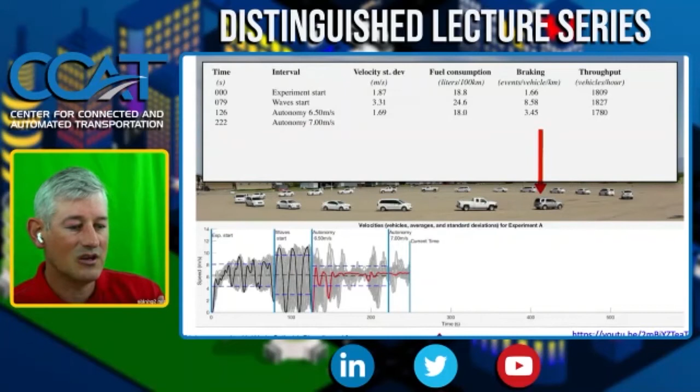At this time, we've transitioned from human control of the velocity to automated control of the velocity with our controller. And as you watch over time, these traffic waves that used to be so prevalent are now starting to dissipate. And there's a lot more information that's flowing along here than just how the traffic itself is starting to dissipate. We're able to measure the standard deviation of the velocity.

We're able to measure the fuel consumption of the individual vehicles, how often they're braking, as well as how many vehicles are moving through a certain spot on the ring at any given time. And what's really neat about this is that we can continue to adjust what are the expectations for how fast this traffic can go. And we can see that there's a threshold past which it can't go, that even our automated controller can't stabilize the traffic. And so then we have to keep adjusting our expectations there.

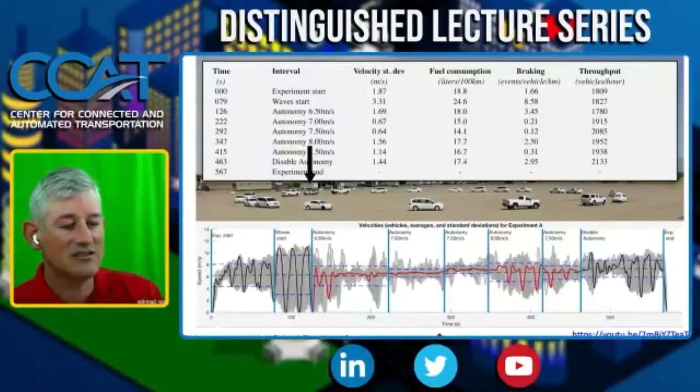And finally, when we turn our controller off, and you can see the arrow is switched back to black here, those traffic waves come back and we start to see the same kinds of high and low braking and velocity that we saw before. So again, there could be a lot of exploration of what's kind of going on here.

I want to skip to talking about what are the data pieces that we got out of this experiment, because you can begin to see when you start to look at these data that there's pretty clearly at the beginning some times when we have traffic waves happening. When we turn on the autonomy, we see those traffic waves begin to attenuate and be dampened. And then over time, the traffic waves themselves really kind of go away until we try to go too fast again.

So part of the overall control expertise that we're trying to do here is to figure out what's the best that we can expect from this particular traffic stream so that we can keep traffic moving and keep people safe. One of the nice outcomes, by the way, was that we discovered that there was something like a 40% decrease in fuel used between when the waves were happening and when we were in autonomous mode at about 7 to 7.5 meters per second. And that led to some follow-on work sponsored by the Department of Energy that I'll talk about just a little bit later.

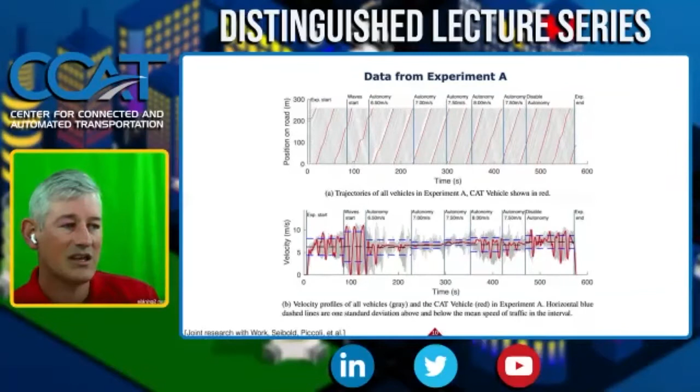So the controller that we were using for this, again, came from exploration of how we could do this in a way that the cars would be driving as much like a human as possible. So I want to talk just briefly about what that controller was. It was a controller called the follower stopper, which was named because there was another controller called the obstacle stopper. This one is the follower stopper because it follows a car instead of just trying to avoid an obstacle.

So with that little bit of an introduction, I want to skip a lot of things that went into this test that are really interesting, but take away from the overall time that we have with each other, and just skip to the results, which any moment now should be coming.

One more time with feeling. Yes, here we go.

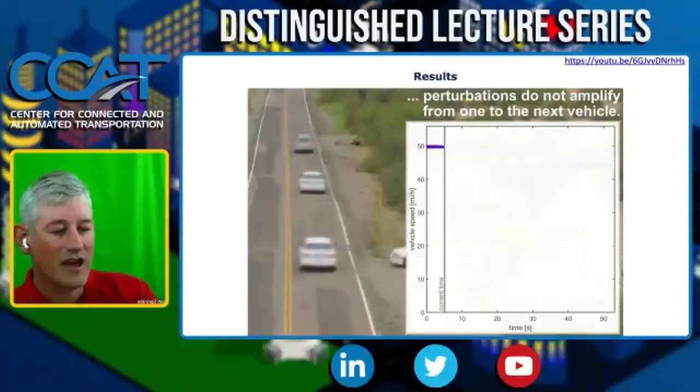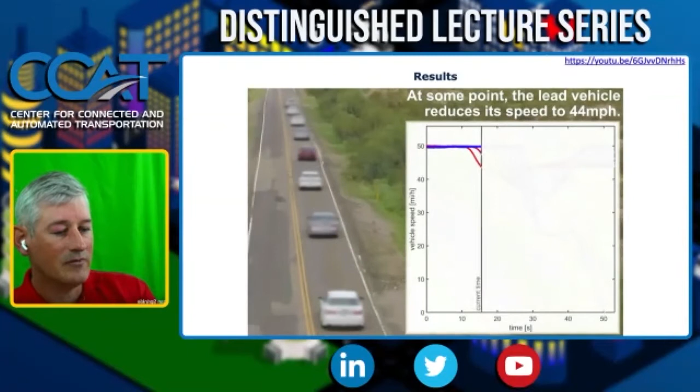Again, this is a great example of some of these superb Arizona roads that have nobody on them. This is actually not a police car over to the right. It's just somebody's car that's parked there. So there goes the CAT vehicle in the front, and then we have several other vehicles behind that are just using their existing ACC controller to follow the car in front. So the CAT vehicle decreases its velocity by about 6 miles per hour total, just enough to turn the brake lights on, actually, which is why we chose that amount.

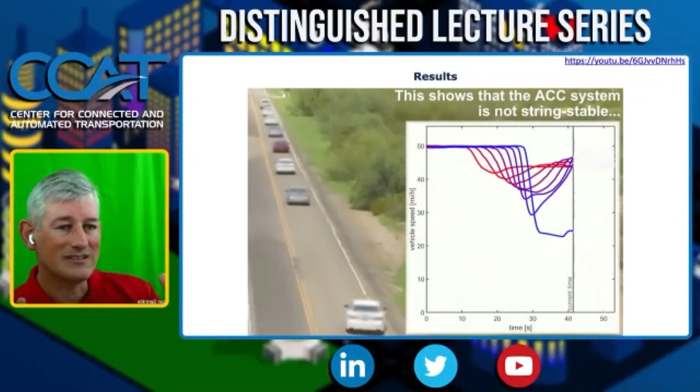The next vehicle brakes, it gets down to about 10 miles an hour slowing down, then 12, then 15, then 18, then 20, until the last car, which was driven, by the way, by a qualified stunt driver, falls off so low that the cruise control in his vehicle actually switches off. And beeping sounds happen to tell you that a collision is imminent if you don't brake, et cetera. So it's really kind of a frightening thing. And what we saw was that if we put a bunch of cars that have existing cruise controllers on the road with each other right now, it does not make traffic better.

It actually makes it worse. And that leads now to us thinking about, again, how do we navigate this time? But what I want to highlight for a few minutes is the test bed that we were using and how that test bed allowed us to come to some of these kinds of conclusions.

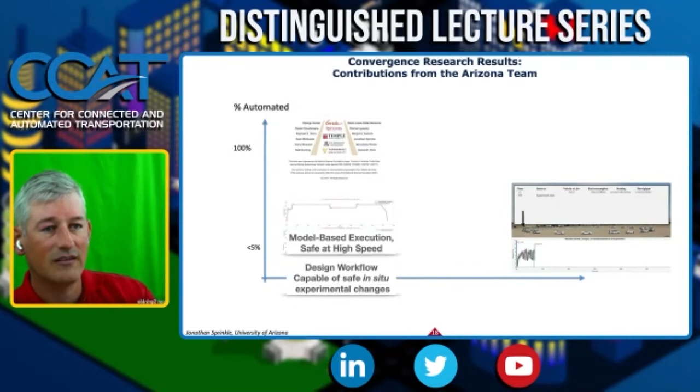On the one hand, we had this almost everybody automated kind of experiment that we did, where a lot of the things that we needed to have was model-based execution that could be safe at high speed, that we could verify the kinds of control inputs we were going to provide, and that allowed us to have really rapid in situ experimental changes. As an example of that, we would do an experiment, we'd come back and look at the data, and then in 20 minutes, we would decide how many cars we can put in the next string so we can run it again, and will that result in the potential for a collision, or will we still be safe?

Certainly, it also involved us figuring out in the experiment what our intermediate velocity set points should be so that we can trigger the ACC response. And so if we needed to do those kinds of things on a long time scale, it could have taken months to figure this out if we needed to go through code reviews, et cetera. What we were able to take advantage of was the code generation that's possible in model-based design so that we can make those decisions rapidly.

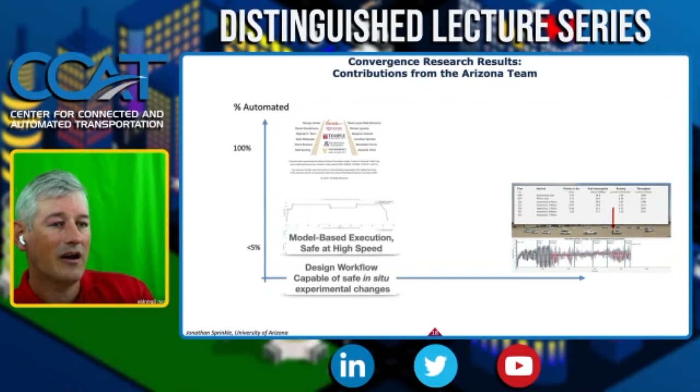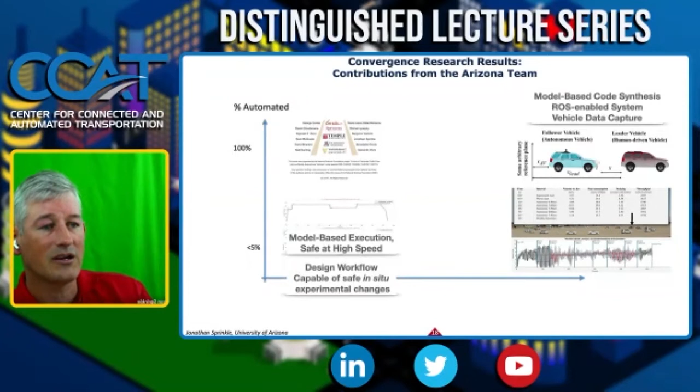In the experiment with the stop and go traffic dissipation, we really needed to have, again, that model-based code synthesis, the ability to look at system data in real time with the robot operating system, and to capture vehicle data for reasons that I'll explain later. And this all came through because of the CAT vehicle testbed, which is something that we've been building now for right around 8 years at the University of Arizona.

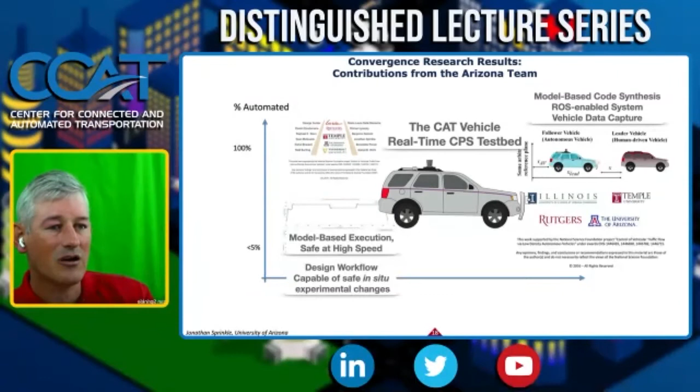And as we've moved through different phases of the testbed, I'm going to show you some of the cool things we've been able to do and why this testbed is so critical to doing this kind of research, where it's not just building an autonomous car, but it's exploring the new theory and applications that we need to have for tomorrow's vehicles.

And if you want to find out more about the testbed or want to see the kind of things that are happening with it, look us up on the CPS virtual organization, where you can find the most recent release and example tutorials to go through in order to see what's going on.

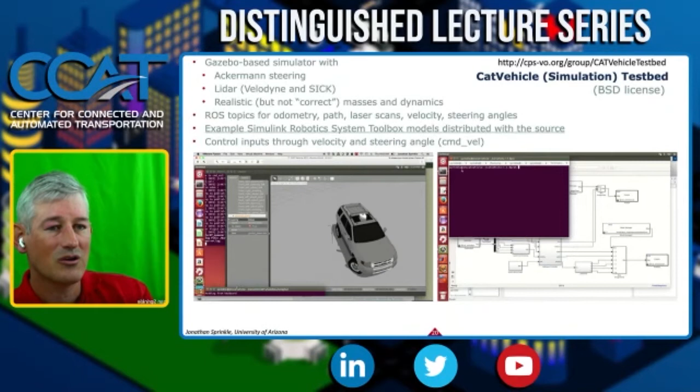The testbed has two pieces. One of them is the simulation piece that allows you to do software in the loop testing. This gives you a full-size looking Ford Escape, which is the kind of vehicle that it is. And that full-size vehicle, we can drive around. We get realistic information from the sensors on board the vehicle, and we get realistic masses and dynamics for how the vehicle itself behaves. Importantly, we are consuming data that comes off of the car in the same structure and at the same rate that we get those data when we're using the car physically as a test bed.

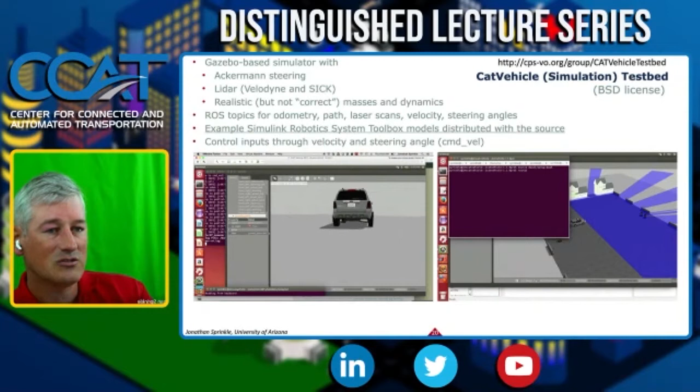So for example, we were able to use some of those features of the software in the loop test bed to validate that we weren't going to crash into stationary objects by creating an environment filled with stationary objects that we tried to drive through. So what you're seeing in the bottom right-hand corner is me trying to drive through a house. I put a house in the path of the trajectory that I was trying to follow.

And I'm not trying to navigate around the house in this case. I'm trying to actually drive over it. And so I've got a component that's inserted in between my desires, which is my desired trajectory, and the vehicle's desire to not crash into houses or anything else that it can see with its sensor.

And so one of the cool things you can do in simulation is that you can just pick up stuff and move it. So I can keep picking up the car. It keeps trying to drive through the same area. So that gives us some ideas that it's robust to position, that it's not just something that we're lucky.

And something that you can't do in the real world, you can't just move the obstacles out of your way like you would move a house. But in simulation, you can. And then we can see that the vehicle is able to take off and drive around.

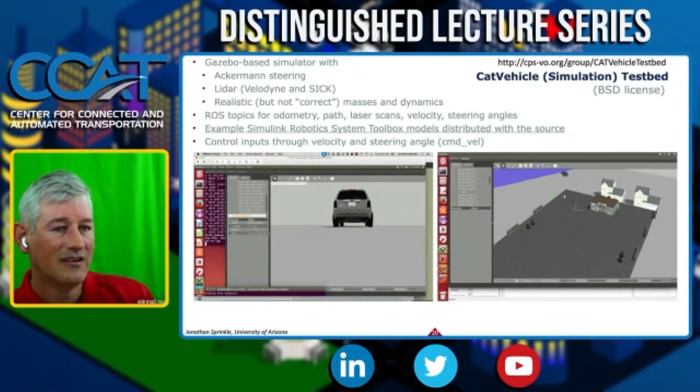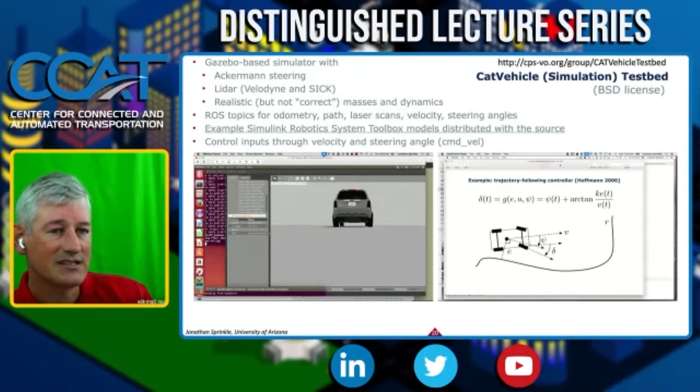So by building up these sort of good feelings about how your vehicle is doing in software in the loop, you can get rid of a lot of the logical errors that you might have introduced in handwritten software by checking to see how things are going with software that you're generating from Simulink-based controllers, because you can test them in Simulink and then move them to the software in the loop test bed. Once things are working in the software test bed, we can move them to the physical test bed.

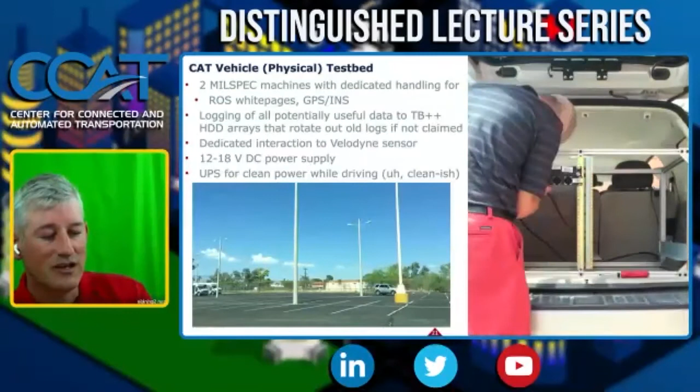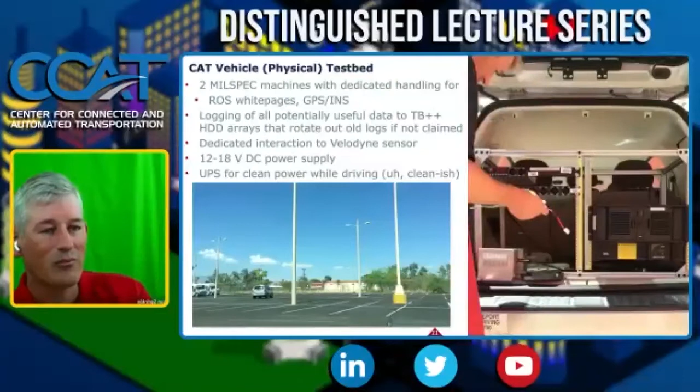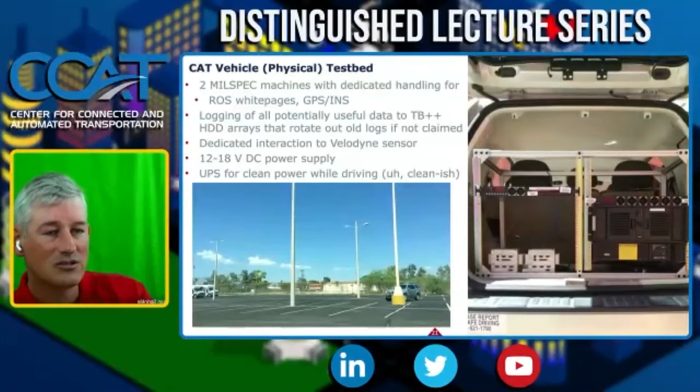In the bottom left-hand corner here, you can see results of an experiment from some of our summer students who were testing that controller that's designed to not drive over physical obstacles out in the middle of this parking lot that's filled with light poles. So if you want to make the dean of your college really nervous, you can say, hey, can you give us a parking lot with a bunch of obstacles in it that if we run into them will cause a lot of damage to university property, because we would like to test our controllers.

The dean gets really nervous in the beginning until you can show them that it's working in software to give them the confidence that they're willing to let you go out there. And of course, it's on me if we actually hit one of them, it has to come out of my paycheck. But that's part of the overall approach that we're using here to build up that kind of confidence and use the tools that are available in the state of the art in order to validate that the work seems to be working.

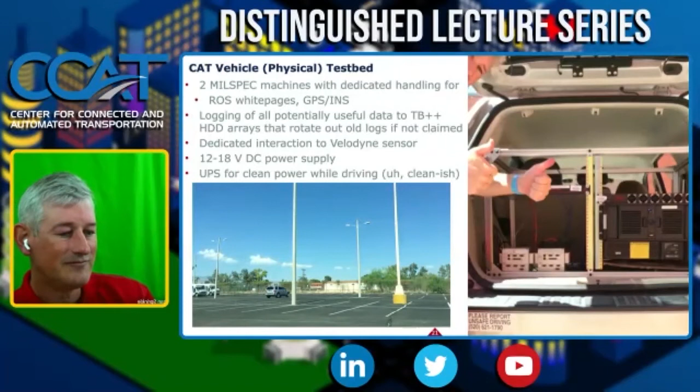The way that we're able to do this is that we're able to depend on a lot of software at different layers of the interfaces so that we can get the kinds of performance that we need in order to do real cyber-physical systems research that we can scale to a societal level. And we're able to do that because we have access to the low-level actuators and sensors of the car.

We have access through ROS to be able to send essentially computer commands to the OpenJAUS framework that runs on the car. And then ROS itself allows us to consume data from sensors. Somebody else is writing all of that code and we're able to just leverage it to produce these topics that allow us to get state information as well as control level information about what's going on.

What we see as we develop and build this as a tool that we want other people to use instead of just the people in our lab is that we'd like to have an engineering or scientific workflow that takes you from your idea to the implementation and allows me as the overall gatekeeper to how people should be using the test bed to ensure that we're doing it in a way that I know to be safe by the evidence produced by the students or the other faculty who are using the test bed.

So we begin by having some traditional kinds of simulation like you do in MATLAB and Simulink. We replace the synthetic data sources that might come from the sources blocks within Simulink with data that are coming directly from something that's recorded on the car or something that's recorded from the simulation environment. We validate those kinds of behaviors within Simulink.

We generate code using MATLAB Simulink's code generation tools to generate ROS level software that we can then run in our software in the loop simulation and then directly deploy in the hardware in the loop to either simulate with, again, canned data or to use the physical platform and then do work there.

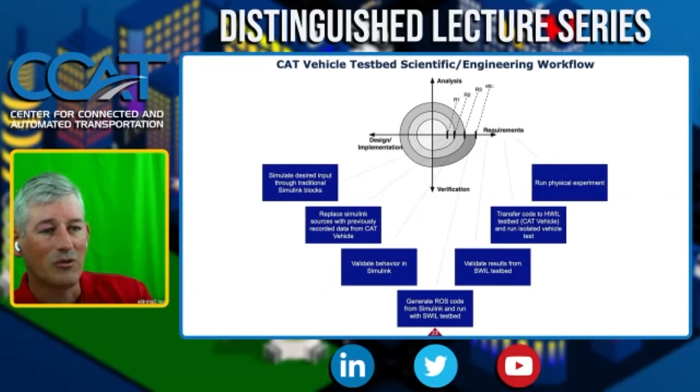So by taking advantage of this kind of work, we can stage different requirements of the process and take a more agile approach where every stage in the process has a different requirements level that you're meeting. And then over time, you build confidence in how your system is behaving. And it stages actually really well, so that over a 10-week period, for example, in the summer, our undergraduate students can go from knowing almost nothing about autonomous vehicles to being able to show a final demo with a car moving around in a parking lot with nobody inside, which is really nice.

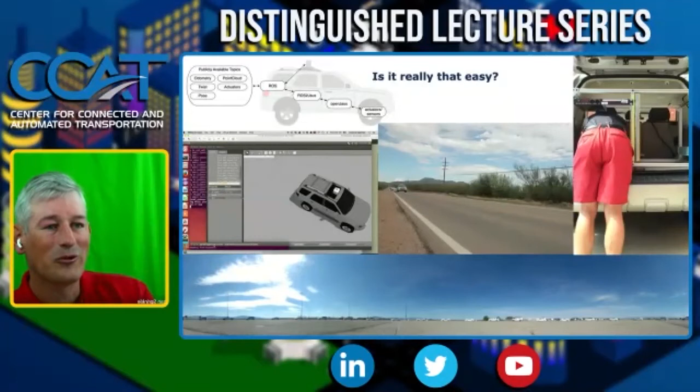So I'd love to say that it's really that easy, that that's all you really need to do in order to have a test bed like this that can do really crazy research on short time scales, that all you need are those software layers, and you can use those software layers at different phases. But unfortunately, it's not actually that easy.

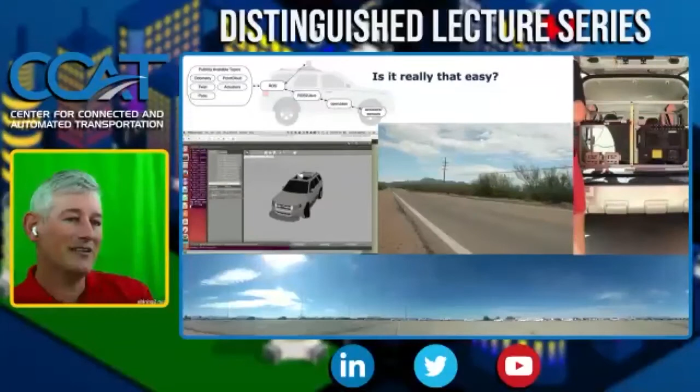If you want to be able to do some of this kind of societal scale research with cyber-physical systems, you need to get an idea of what kinds of challenges you might run into when you make those deployments. So for example, two things that I want to talk about fairly briefly are the kinds of delays that you see in sensing and filtering when you want to deploy a system like this, as well as delays in the actuation and dynamics that you have to take into account if you actually want to do time varying kinds of control with a system like this.

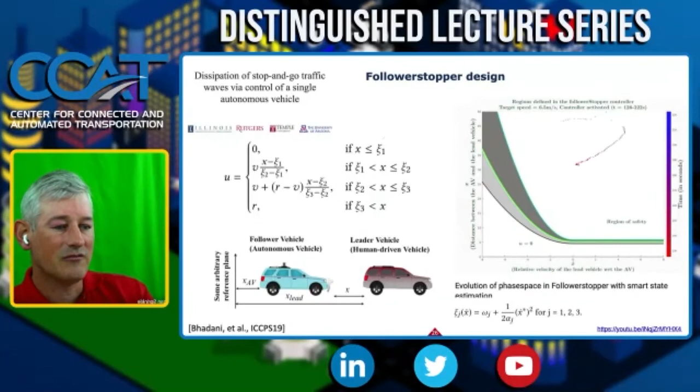I'll talk about it first in terms of the follower stopper that you saw earlier. I think you probably remember this slide where what I'm showing over on the right is the distance between you and the car in front of you, which seems like something that, yep, if I had that distance information, I could design a controller like this and we could make it happen. And many of you in the control area might actually have looked at this controller and thought, that's a really easy controller. There's kind of not much to that. I'm not really sure what the threshold had to be to have a more sophisticated controller that might be able to do more sophisticated things.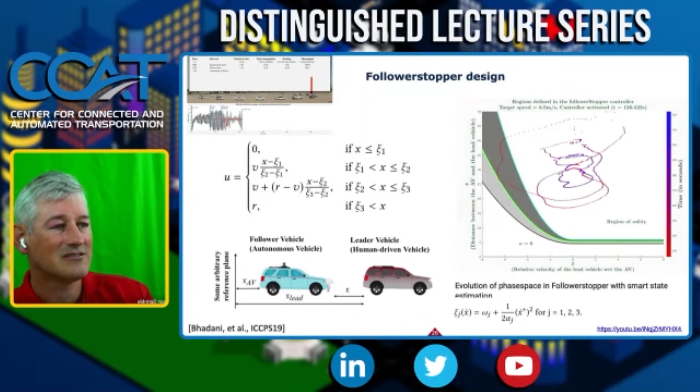And one of the reasons we ended up using the controller that we did was trying to mitigate the challenges that we had in using real-time sensing so that we can make real-time decisions based on the data that we had. So for example, if we just sat behind a car in the parking lot and both we and the car ahead of us moved at the same speed, we would sometimes end up with these vastly different estimates of what's happening.

And so actually the top two charts show you what happens if we just sit in front of a wall and run the laser sensor and estimate the distance to the target. Sometimes we get these really large distance estimates that if we interpolate them and divide by delta t, we end up with an estimate of say 4 meters per second, when in fact the obstacle is not moving at all. And so we have to be able to overcome these kinds of things by adding filtering to the system. But when you add filtering to the system, what you end up with is delay.

So in this example, I'm actually playing the same data set that gave us the estimate of the phase space of relative distance and relative velocity of the car ahead. But on the right-hand side, you're getting the raw data from the laser sensor. And so you have to make this trade-off between how many steps do you want to sample so that you can get an understanding for how far away you actually were and what your relative velocity actually is, versus on the right-hand side, if you want to act on the most recent data, you're going to be stopping a lot more than you should be because you're going to be getting these outliers that make it look like you really need to stop when you actually don't.

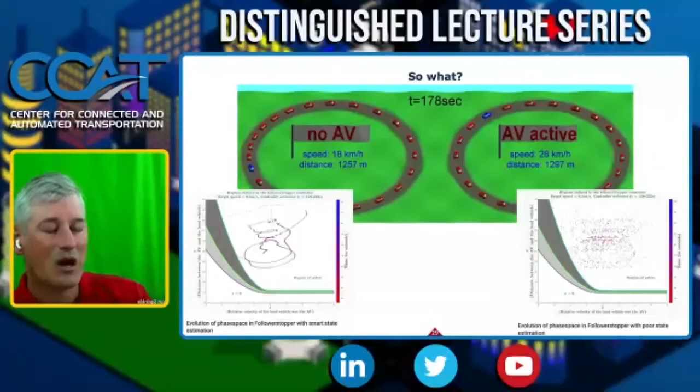And where this really matters is if you wanted to use some of the more sophisticated control algorithms. What I'm showing in the simulation at the top here is an original controller that we designed that seemed to show a lot of promise, because when the AV was active, we were able to see a tremendous impact in the positive behavior of the overall stream. But when we tried to execute the controller outputs that we got from that controller, we found that we weren't able to execute them, both because of problems in the sensing delay, as well as problems in actuation, which I'm going to show you in a few minutes. So that's the other half. These delays in actuation and dynamics limit what it is that we're able to do, and we need to overcome that also through software interventions.

And it's kind of a worst case scenario when you're trying to keep traffic from stopping, and the controller that you're using to keep traffic from stopping is actually making your car stop. And so if we tried to execute this controller, without a doubt, we would have made things worse and not better.

So we took advantage of some of these software interface layers and were able to build some new low-level controllers that were executing at this ROS2Jaus and openJaus layer instead of just the ROS layer, so that we could inject new controllers that had a faster response time in accordance with the dynamics that we had, so that we could follow time varying trajectories a little better.

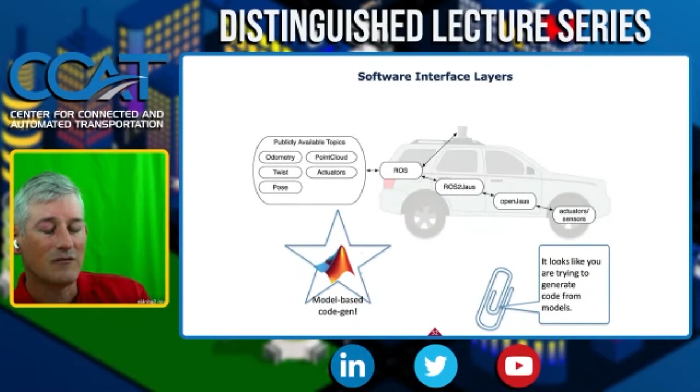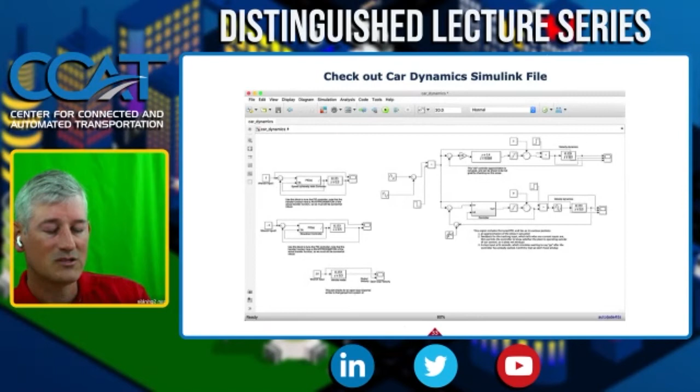And again, I think actually Ram Vasudevan, who might be on the call, he and I had a tutorial session at CDC last year, so you can find a lot of the code on this based on that CDC tutorial session that takes you through this. Essentially, we built some car-like dynamics based on system ID. Once we had the dynamics from there, we designed and prototyped some PID controllers based on some off-the-shelf techniques.

The simulation tool has a much wider state space available to the car than we can execute on the car. And that's important information when you're developing your simulations as well as your safety tools to understand what are the physical limitations that are out there. So we had to go back to the drawing board and develop some new controllers at that point so that we didn't find ourselves thinking that we were safe when in fact we were not safe.

And I think that's overall one of the messages that I'd really like to get across, is that to do this kind of societal scale work, the research test beds really need to enable you to go beyond simulation when it comes to these kinds of challenges. Or what you'll find out is that you'll show up somewhere to show a simulation to somebody and they'll say, that looks great, but we're not sure that those simulations are going to translate to practice or not.

So reflecting on this from the Arizona Ring Road experiment, again, thinking about that role of data and how data is going to play a significant impact on societal scale work. If we think about all the different pieces that went into the work that we did, culminating in this final autonomous vehicle experiment, it began with fundamental research on wave theory.

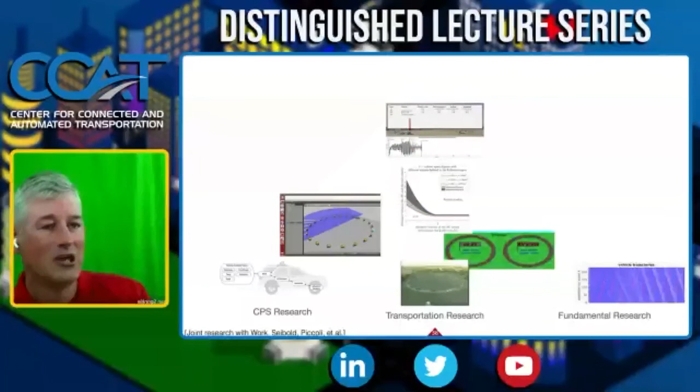That culminated with transportation research on this ring-based simulation that you can see here that seemed like it was going to go well. From the CyberPhysical Systems side, we tried to simulate that and realized that the simulation engines that we had just would not work. And that meant that we needed to skip a lot of the simulation that we would have done and instead do it directly on the vehicle, which required us to come up with controllers that were safe, that we knew we could deploy in real time.

And fortunately for us, all three of these led to this experiment that resulted in lots of really cool data that popped out of it and really serves as that model of convergence research. But I want to talk just briefly about the challenges that we saw in data capture, again, just 5 short years ago, and kind of what was going on.

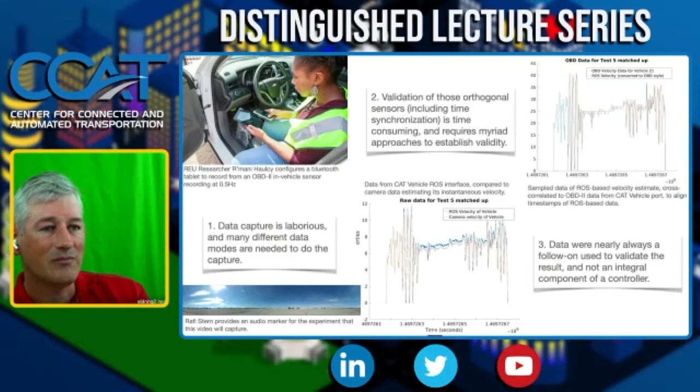And so what we ended up having to do was spend essentially weeks, maybe even months, making sure that the data that we were using to validate our work were valid, and that we weren't going to be using them later to design a controller based on data that were potentially flawed. So that really calls into question, again, how we can make sure that the data that we're using here can scale and how people can really trust what's happening there. So those 3 challenge problems that we had, if we can solve the first 2 of them, what we can end up doing is then accelerating that role of data in discovery.

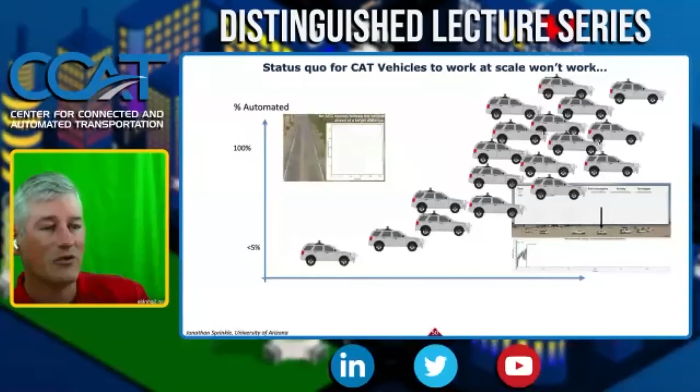And that's where we run into more challenges, because even if we can solve those 2 problems, we're going to have an issue, which is that a CAT vehicle or something like a CAT vehicle is not affordable to do at scale. We can have a couple of these, but we can't have some that exist in all areas of this pipeline so that we can produce hundreds of cars that might be driving all at once, that are all coordinating what their velocity is to make traffic better.

And that's where we start talking about what could I do if, say, I wanted to have 100 cars that I'm controlling all at once, which is exactly what we're working on in a Department of Energy project that was funded right around a year ago with Alex Bayen from UC Berkeley as the principal investigator. This involves collaborators Benedetto Piccoli, Benny Seibold, and Dan Work as well, if you know any of those folks. Really what we're interested in doing at the end of the day is actuating up to 100 cars at one time, where up to 2,000 cars are going to be affected by the intelligent design of our system.

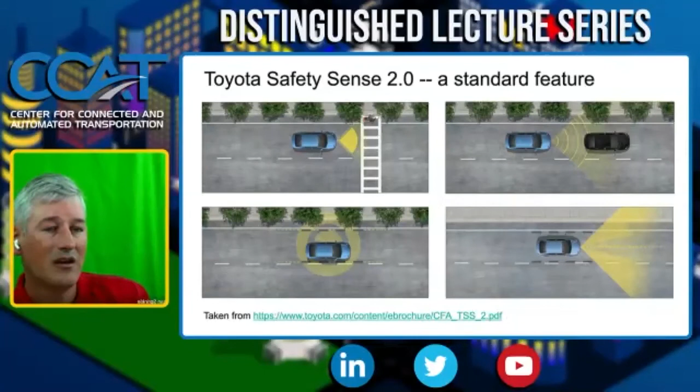And in order to do that, we can't just have 100 CAT vehicles, but we could possibly find 100 off-the-shelf cars that have many of those same capabilities if we can bring that data and actuation costs way down. So what we're taking advantage of is what many of you may know, that cars today have a lot of these data capabilities already built in because they're building safety features for consumers. And so if you know information about how far away the car is from you for advanced adaptive cruise control or for pedestrian detection or lane keeping, all you need to do is figure out how you can tap into those connected components and attach your own database so that you can get the features off the car and then make decisions based on what's happening there.

Companies are entering this space right now. So if you're familiar with Comma AI, you can buy something from them called the Black Panda. Once upon a time, they had the Gray Panda. With this and a car harness, altogether total, it's about $500.

You can download a lot of cool data and do a lot of cool things with your car, but you can't get it at data rates that are suitable for research. So what we're seeing here is that some of the data that we're getting actually end up representing lost packets, and therefore you can't differentiate the data reliably. You might be missing important data, and that reduces your ability to use these data in machine learning kinds of contexts.

So what we need is to take some of the data acquisition that we're doing and make it research quality, which is what many of the folks in my lab are now working for. And that's going to give us opportunities to automatically add structure and to bring more data gathering at the lowest end of that triangular feature where we're doing the convergence research to enable you to use analysis tools for data science faster.

So to take you briefly through some of the kinds of cool results that we're able to do with this, I want to talk a little bit on the acquisition side for capture and control with this software package called libpanda, as well as on the analysis and discovery side with an analysis tool called Strym. You can find some more information on our GitHub page about this, but essentially we can use a Raspberry Pi with a couple of off-the-shelf pieces and some customized software that we have in order to automatically gather data from the car.

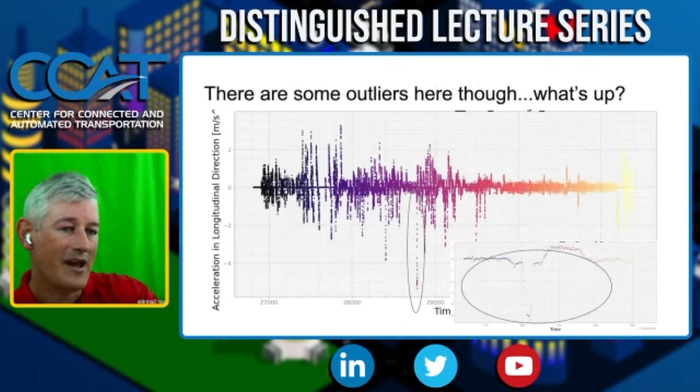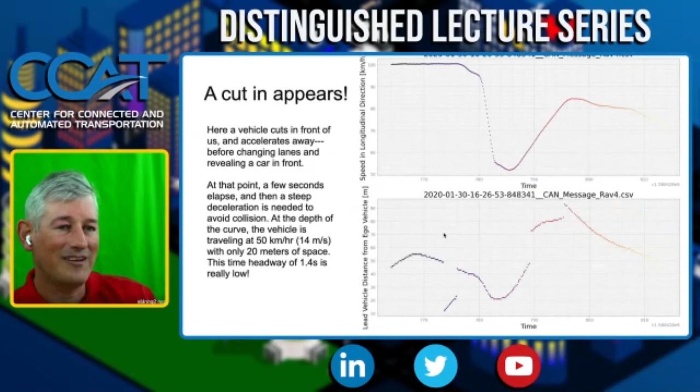We have some really cool dash cams that are attached to the cars that allow us to correlate what's happening on radar with your speed, with what's happening in the environment. We can look at data in aggregate to get information about how a person happens to accelerate or decelerate. And if we find outlier data in there somewhere, we can say, hey, I wonder why I had this massive deceleration here. It allows us to zoom in on those data, maybe compare it to the radar data and see that there was a point here, I don't know if you can see my mouse, where somebody pulled in front of us and made it look like that traffic was beginning to accelerate. And then they got out of our lane and then we had to slow down.

So exploring these data is part of the Strym infrastructure that allows us to extract data from those CAN files, to analyze things like the speed of the car, to get information about how far away the lead vehicle is from you based on radar data, and to look at information like what the radar looks like over time. So here's an example of all the radar traces we got from this particular track over an entire drive, so that you can see exactly what your radar range and angles are.

We can even overlay this on dash cam footage, and I'm just going to really quickly show you. I have to skip ahead in the video here to be able to see that. In the bottom right-hand corner, you see the dash cam from this car. We can see that there's a car in one lane to the left of us, as well as one car in front of us. And those correspond directly to these kinds of blobs that you see popping up on the RViz piece here, which gives us an idea that we're able to actually see in ROS in real time exactly what's happening to the car.

We can even correlate the data, for example, only when cruise control is off. So we're getting state data about the car that allows us to break it down into regions where I know that I'm getting specific data about how this driver is driving when they're following another driver and somebody's in their blind spots. We can have a lot of these things as sort of database queries now.

And once you're able to get data at that scale, you're able to start looking at an actual driver's behavior and get naturalistic driving at scale with $800 a vehicle instead of, say, $8,000 a vehicle of equipment that you have to add. And that's going to bring us a lot of these kinds of discoveries in these human-in-the-loop systems, which is a really exciting new frontier. How can we correlate data from the sky that might be coming from cameras with the instantaneous data of all the vehicles, or a subset of the vehicles that might be moving through the flow?

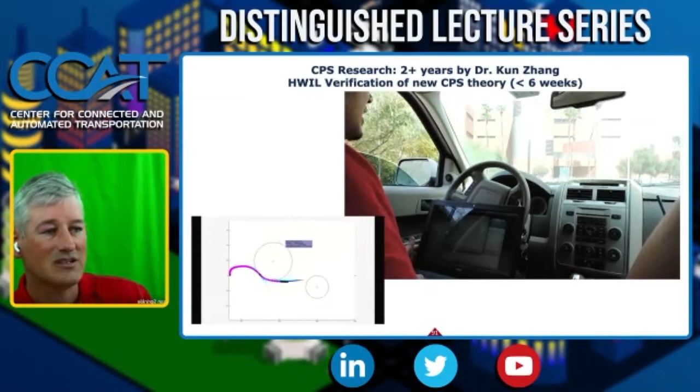We also had some fantastic examples of students who took existing theoretical research and translated that into hardware-in-the-loop experiments in just about 6 weeks, which was really amazing. If you want to learn more about that, you can find out more on our YouTube page. The JMS CSL group is a great place to find the videos of all the students who come through our program. And I'm really, really proud of all the work that those students have done over time. Over the last 8 years, these students have come miles and miles with the work that they've done. And even last summer, they were able to, despite the pandemic, produce 4 groups worth of really amazing research that I'd love for you to know more about in the time that we have left.

The thing that I'll close with is thanks so much for the support from the National Science Foundation, not just because of what they've been able to do to support the research, but also to support the research participants.

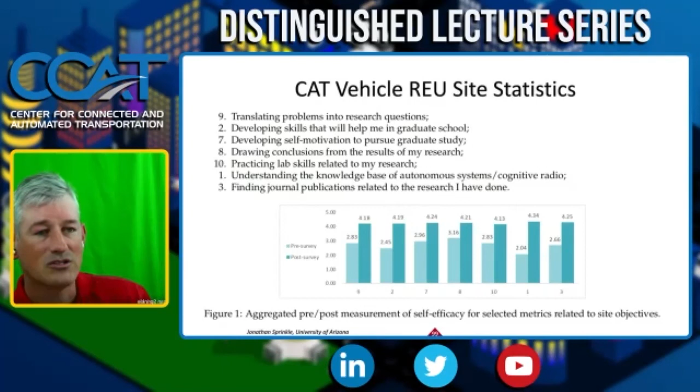The people who've come through the CAT Vehicle REU site have much more confidence in the work that they do. They understand more about research and cognitive radio, machine learning, and autonomous vehicles. And one of the truly amazing outcomes is that we don't require that they go to grad school, but we really strongly encourage that they apply.

And out of all the students that have applied in the last 8 years, that have graduated, something like 87% of those students have gone on to receive a fellowship. They may not have taken the fellowship and they decided to still move to Silicon Valley, but they gave themselves options that they wouldn't have had otherwise. And that's kind of how I'd like to close it up.

Think about what you can do for broadening participation in computing, broadening participation in engineering, by thinking about what's a target audience that you believe you could empower in the future who currently doesn't have opportunities now. And think about ways that you can make a difference by empowering them, either by more training that you would do or more focused opportunities that you're going to give to them.